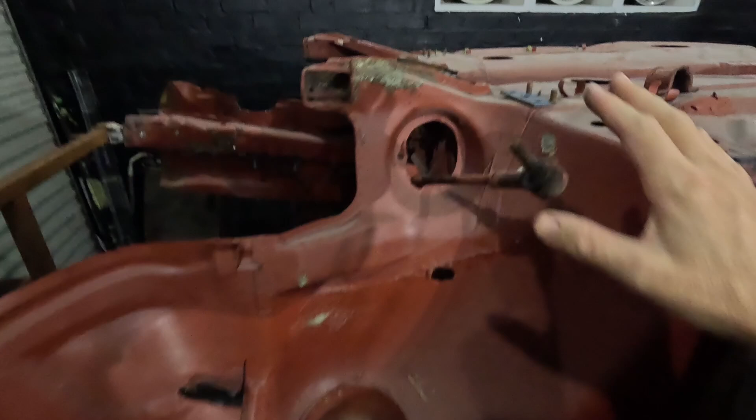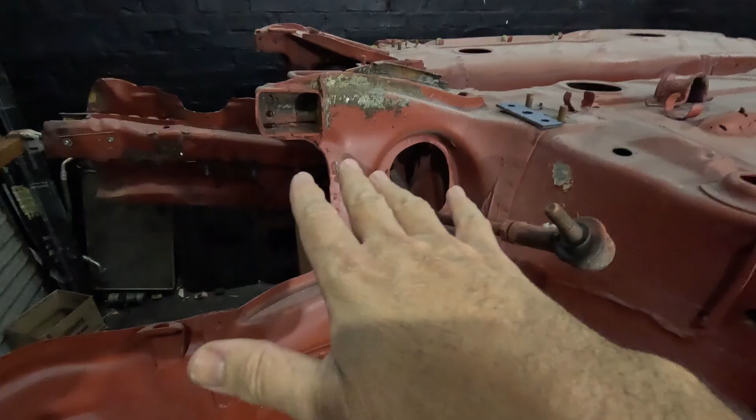So in proceeding with this, I don't need to scan in any of this bodywork. All that I'm going to do is I'm going to use the lower control arm and keep that geometry exactly as it is. So it's still going to mount at this point. It's going to have a ball joint at this point. The only difference is I'm going to make it so that I can adjust the lower control arm to move the wheel forwards and backwards in the well.

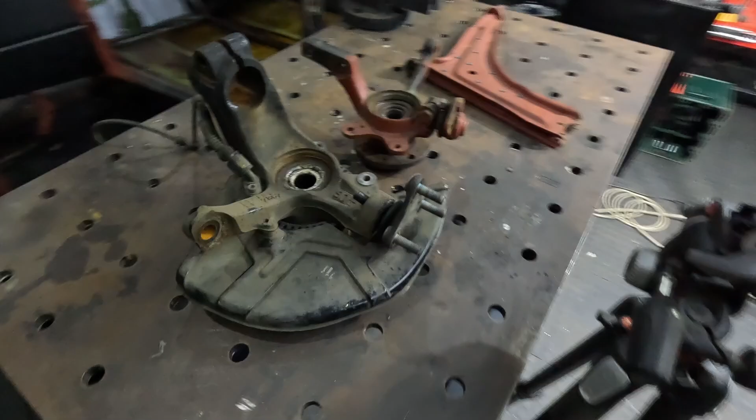I'm still going to use the MacPherson strut, and here are the two spindles showing the difference between the Audi TTs and the Mark 1 Golfs. So I still want to use this spindle here. I want to use this connection, and the reason for that is because you can adjust the camber at the lower point as well as at the top. I'm going to be putting in camber plates, whereas on the TT it's a fixed connection. You cannot change that angle of the strut coming out of the spindle. So that was the one reason.

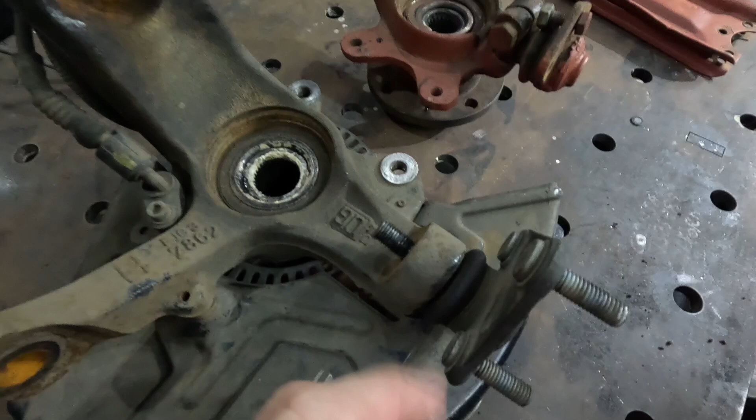The reason why I'm not using the TT's spindle is, for one, because of that reason, and another one is because of the distance from this CV joint axis to this lower ball joint here. It's quite a big distance if you compare it to the Mark 1. So it might have worked, but it's a lot of work to see if it might. So I've decided rather to stick with the geometry from the Mark 1s.

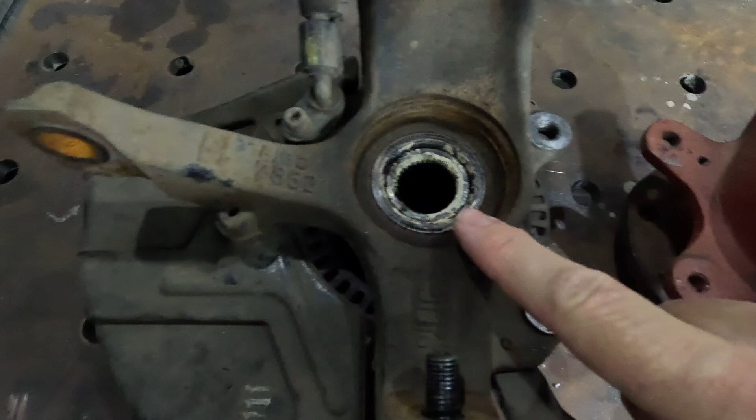The reason why I'm not sticking with this hub is because of the size of the CV joint that's used. This uses a 22 spline, I think it's 20 or 22 spline, whereas the Audi uses a much bigger 36 spline, I think. The bearing itself on the TTs is much bigger. So I didn't want to use small little CV joints with 250 horsepower, maybe a bit more at a later date.

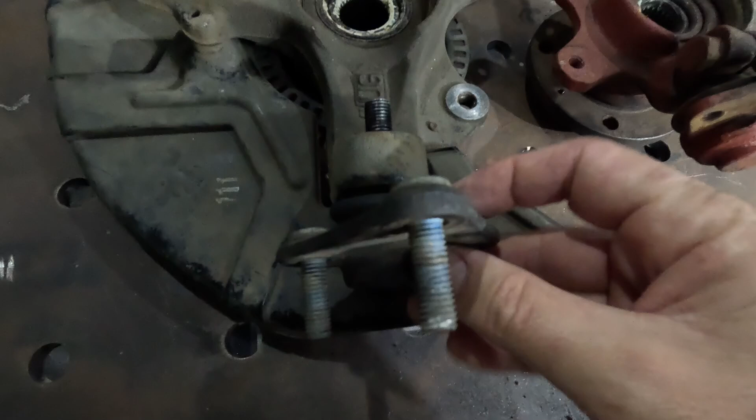So the first thing I'm going to do is scan in this hub, and then again we're going to pick up on these 2 points, this point, and where the lower ball joint is. I'm not going to use the Mark 1's lower ball joint, just purely because this geometry here is a bit funny to make up. So all I'm going to do is I'm going to use the Audi TT's ball joint and then transfer that onto my new lower control arm. So onto the drawing board, and let's get drawing.

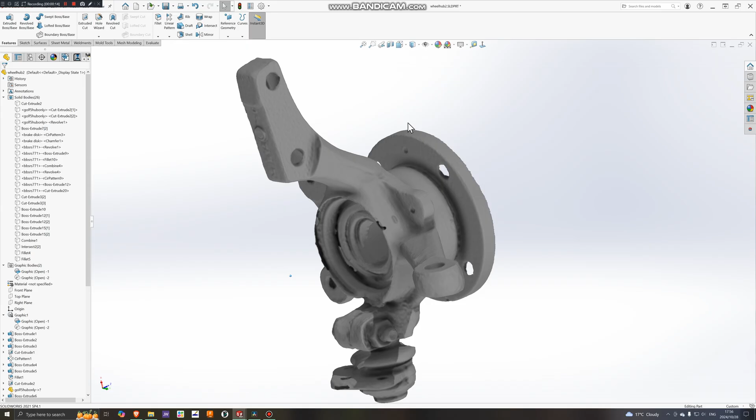So if I just turn off visible edges, shaded view, there we go. So the scan came out pretty good. I didn't try and make it perfect to fill in all these little voids. It just wastes time. I've got what's important, which are the locations of these holes here, the axis of this ball joint and the face of this spindle.

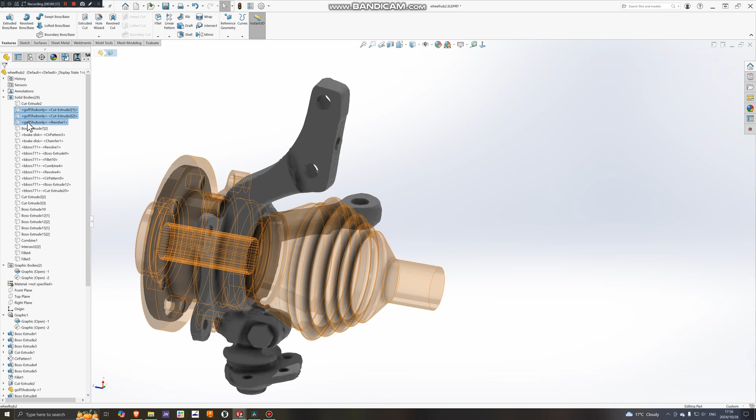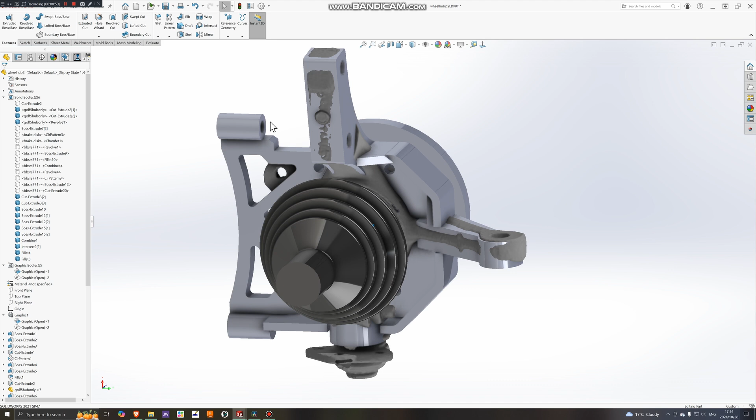So I'd previously drawn in this hub from the rear suspension. So all that I had to do was place it on here and align the axis in the correct orientation and the face of this hub. Then I could start drawing out all the parts. So that's pretty much what I came up with. This plate here, I went a little bit thicker than the standard. The standard is 20 millimeters, and I went to 25, and that's just purely because the coilover system that I'm using mates up to 25 mils.

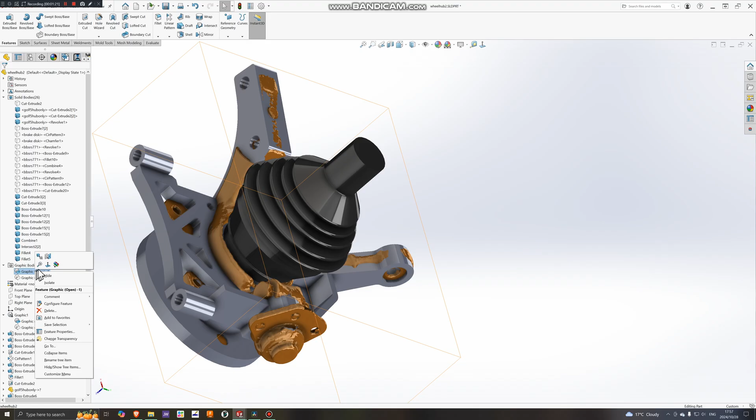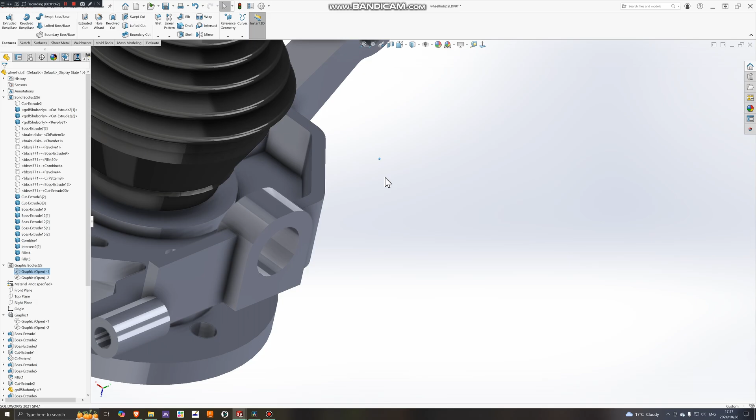So the only difference with this hub is, if I just hide this, I'm not using the Mark 1 ball joint here, and that's just purely because of the way the whole thing bolts together. I'm going to use the Audi TT's ball joint, and I'm going to machine up a bush which has the taper lock, and then just push the bush in and then weld it in place. The reason for this is if I make a mistake on this part, then I have to scrap this whole piece of metal and then order it again. I just waste so much time. Whereas if I mess up a bush, I just have to remachine the bush.

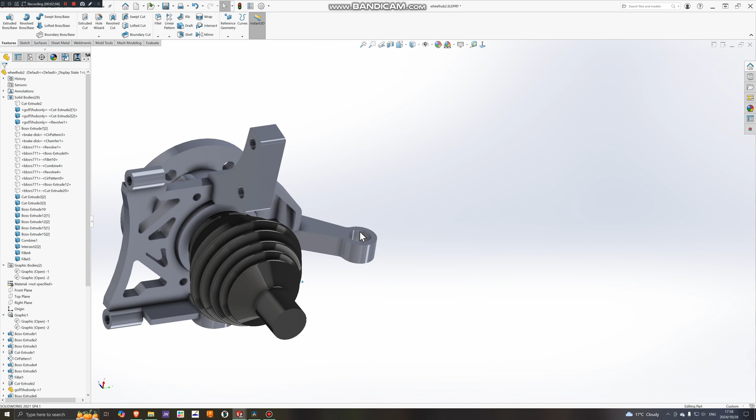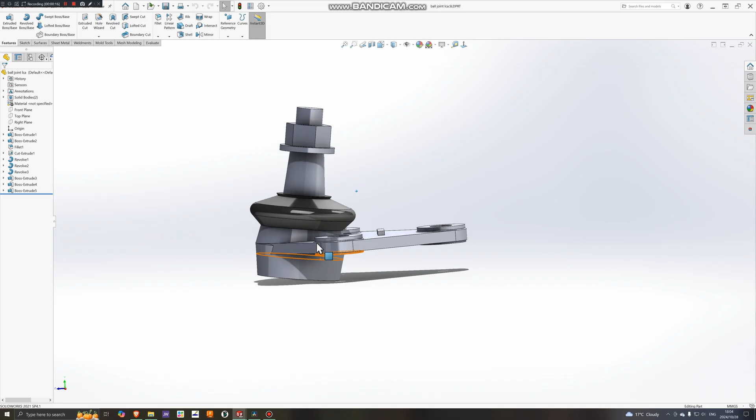Yeah, that's it. So from here, I can carry on with the scanning and scan in the rest of the components. So I didn't bother to scan in the Audi TT's ball joint here. Just quicker just to take some dimensions and draw it in by hand. It's just a flat plate, extruded, a few circles, and then the only thing that was important was getting this axis here at the right angle. And that's it.

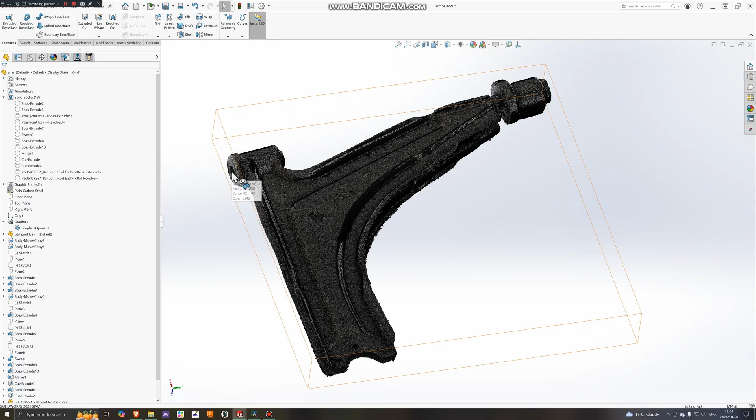Okay, next component to scan in was the control arm. It came out pretty good. Again, the important parts to pick up was this hole here, this location here, the distance, even though I will be making my control arm adjustable, and this needs to be a little bit shorter because I'm pulling the wheel in just a little bit. So from there, I started laying it out. If I just turn the graphic off.

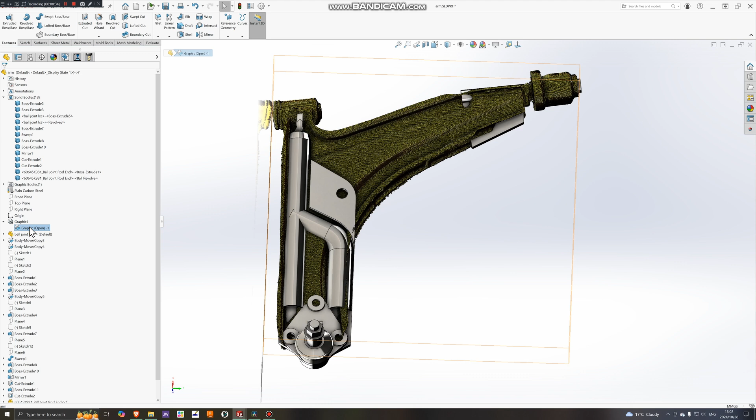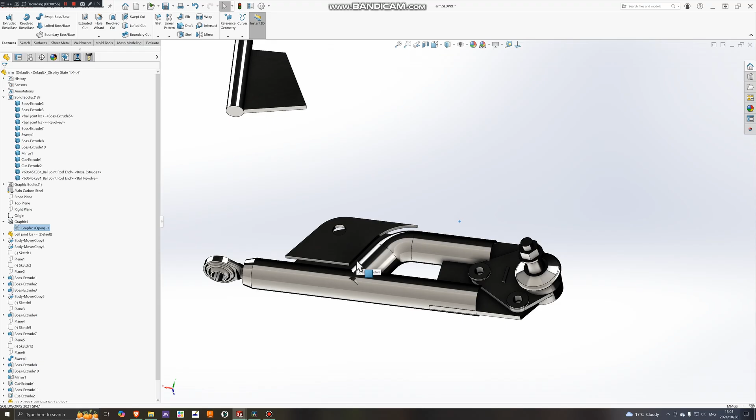So that is pretty much what I've come up with. And then over here, I've got another arm that's going to be coming in. You'll see in the next drawing. It's all 32mm tubing, a few laser cut parts, the Audi TT lower ball joint, and then an M14 heim joint in the back there. Oh, sorry, this is an M16 heim joint. The one that fits in here is an M14.

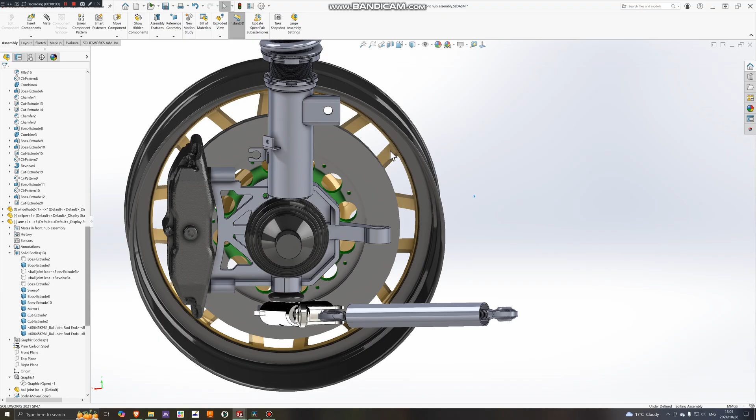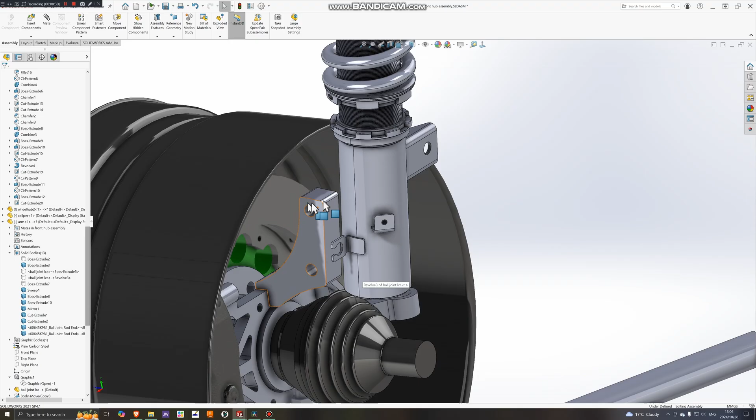Okay, here is a drawing showing the assembly. Even though it's just a part drawing, it just gives a good idea of how everything's starting to lay out. The lower control arm, that is the adjustable connecting rod, which will allow me to change the camber and the caster on the front wheel. The coilover, I haven't drawn in this piece here yet, which connects up, but that gives you an idea of what I'm going for on this version.

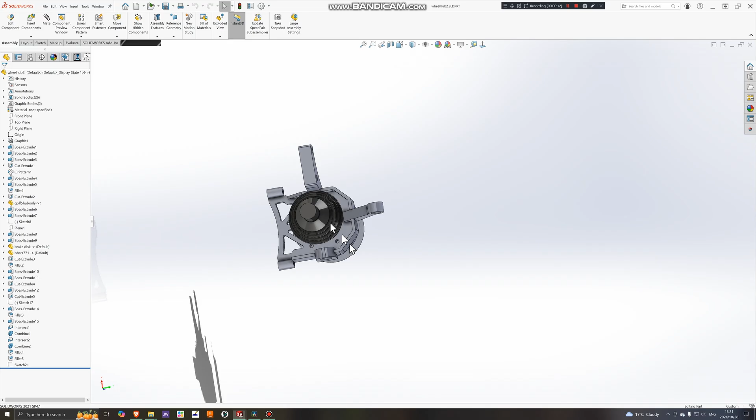So the last thing to do is to export the drawings ready to send to the laser cutter. So all that you got to do is open up the drawing, click File, Save As, select DXF from the drop down, click which face you wish to export. So for this drawing I'm going to do this face, say OK, and there it gives us the 2D drawing

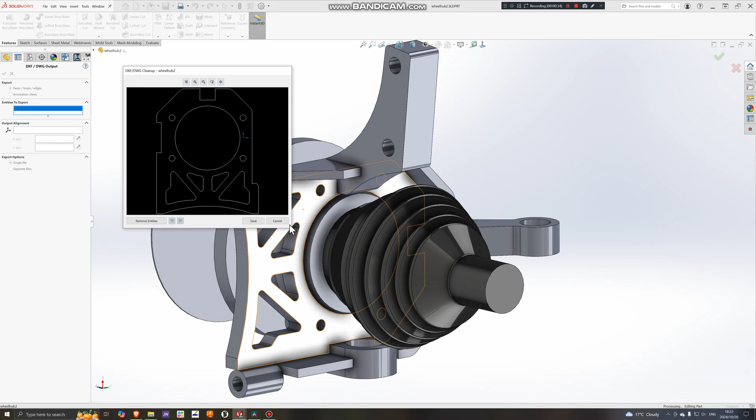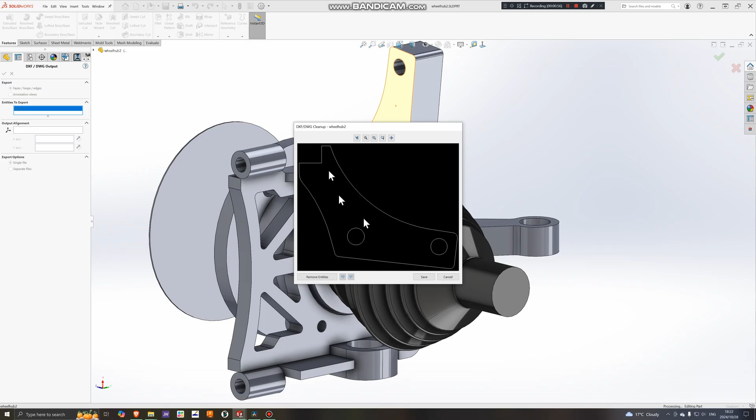ready for laser cutting. So now I save the drawing, and in the description I put the thickness and the quantity of the amount of parts that I want. It just makes it a little bit easier for the laser cutter guys. So if I have to do, for example, this face, say OK, and there it is. Easy as. Talking about laser cutting, let's have a look at how the parts came out.

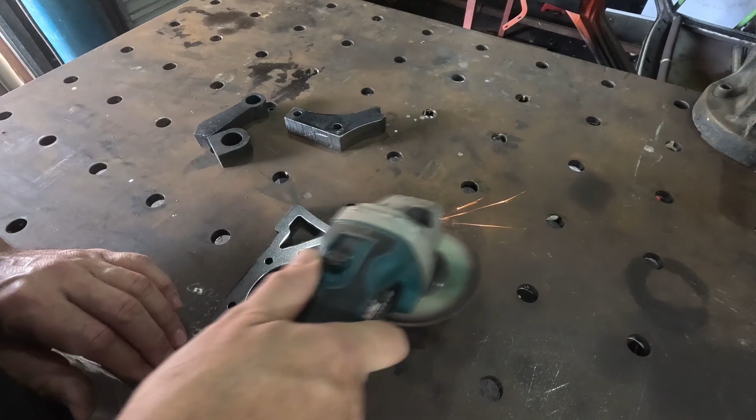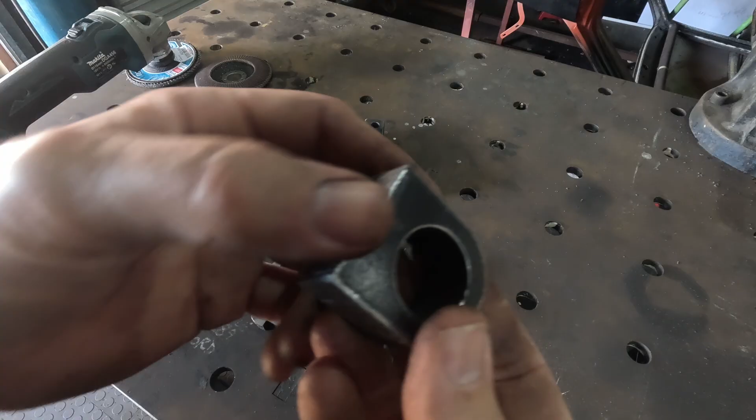Next I've got to chamfer this edge, just for a nice weld when I weld these two together.

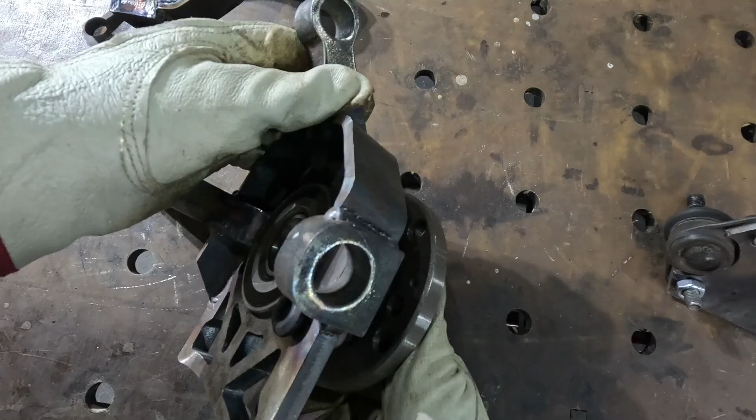So the next thing to do is to machine up some bushes like this, and these are simply going to slot into this hole and then going to be welded in. So it's important to get that angle of that taper correct, because the bottom ball joint locks on that taper. So when these two fit together, you can see they lock together. So that's the next mission, is to make another one of these for that arm there.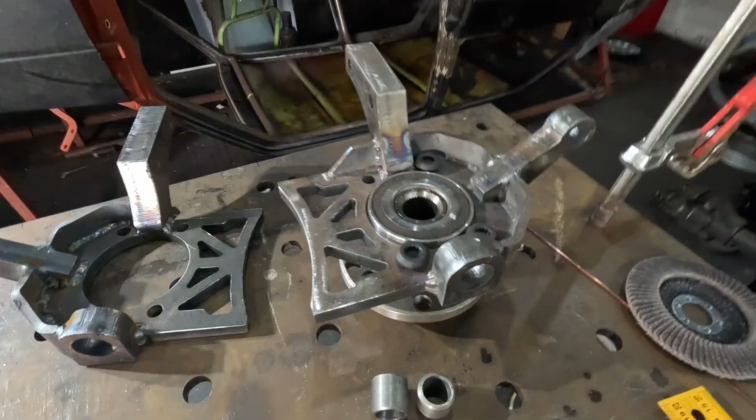And then I need to do the same thing for the steering arms. I need to make two bushes that fit in here and in here. Both spindles, or knuckles, whatever you want to call them, are pretty much done. The next move is the lower control arm. But I think what I'm going to do is I'm going to stop the video here, because it's already getting a bit long.